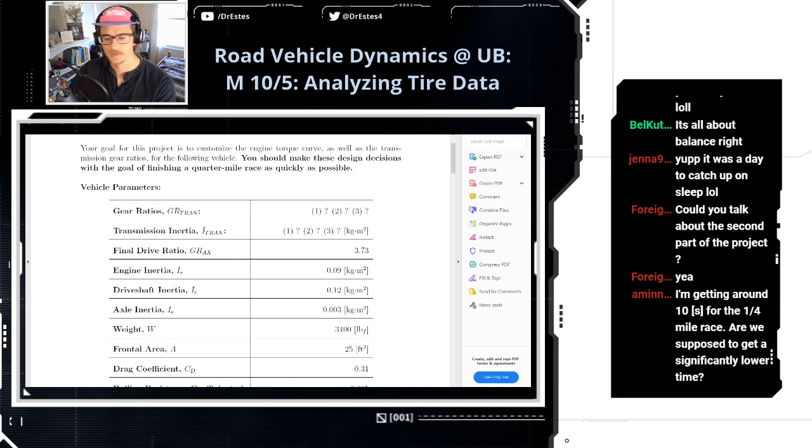Yeah, it's tough. Could you talk about the second part of the project? Are you talking about the group project? Gotcha, okay. Yeah, let's see. I'm getting around 10 seconds for the quarter-mile race. Are we supposed to get significantly lower time? I don't know. I've heard of some people getting 10 seconds. I don't know if you can get lower than that. I'm not sure what the best time is. We got 10.06, the best we can do. Hey! Oh, Hash Brown, you broke 10 seconds?

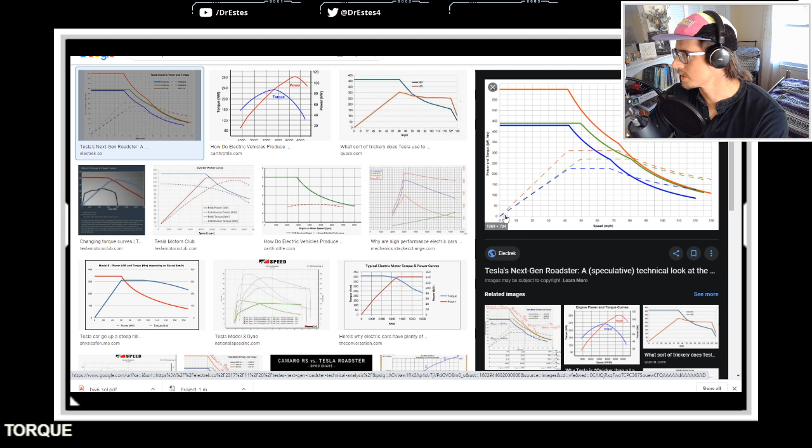It's tricky, guys, because I think there's lots of different solutions that can result in low times. Like, something we know about a Tesla, for example. A Tesla has its highest torque at 0 RPM. Wait, maybe I can pull it up real quick. So, let's see. If you look at a Tesla torque curve, it's something like this. This is the torque, and this is the engine speed on the x-axis. So the torque is highest, and then it kind of stays constant for a while, and then it decreases.

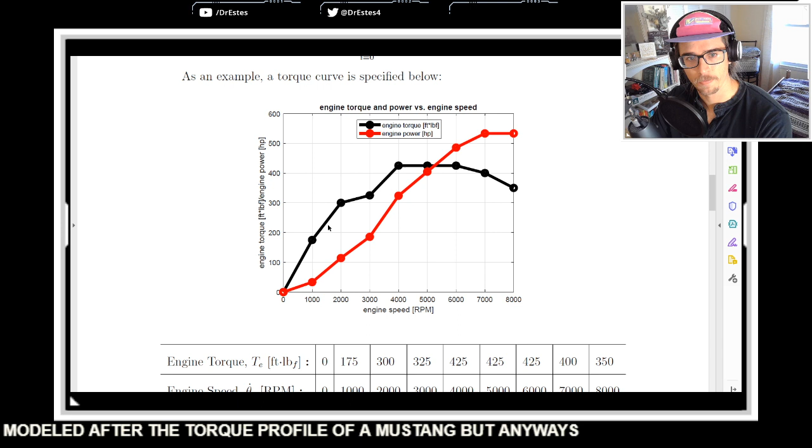And Teslas definitely pull in a quarter-mile race. But I also know that if you put a Corvette against a Tesla, a Corvette has no torque at 0 RPM. It looks very different. Actually this right here I kind of modeled after the torque profile of a Mustang. But anyways, a car like this will catch up with the Tesla at the end of the quarter-mile race, and they'll get a very similar quarter-mile time. So it's two different strategies: the Tesla very quick out of the gate, then it loses its advantage as the race gets longer, but a Mustang gains advantage the longer the race goes.

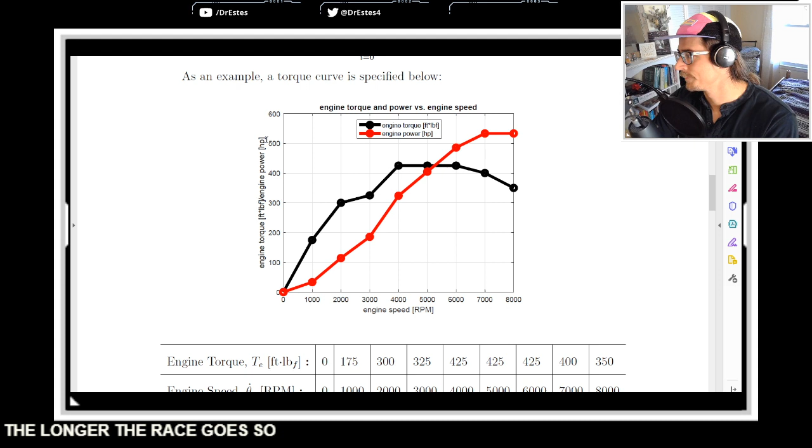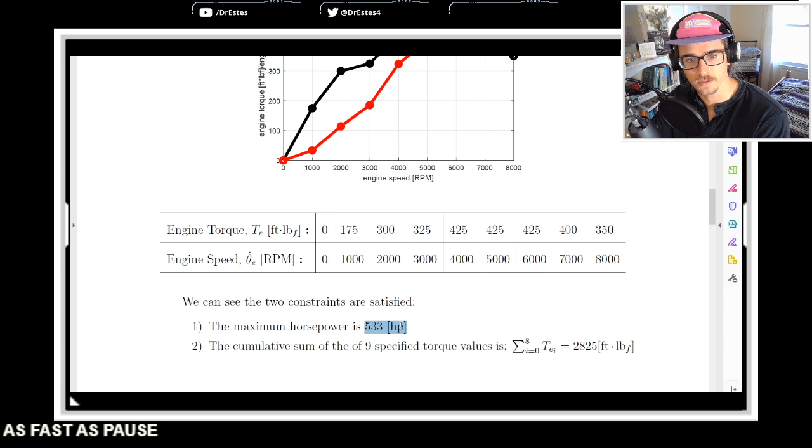All I'm saying is this graph, to get a really fast time, it could look very different. But I know certain principles that you definitely want to apply. Like if I give you these constraints... A Hellcat will actually beat a Tesla Model S P100D with the right tires. Yeah, you're absolutely right. A lot of it comes down to the tire grip. But you should definitely push right up to these constraints. This example I give you, it's not as fast as possible because I didn't create as much horsepower or torque as I could have.

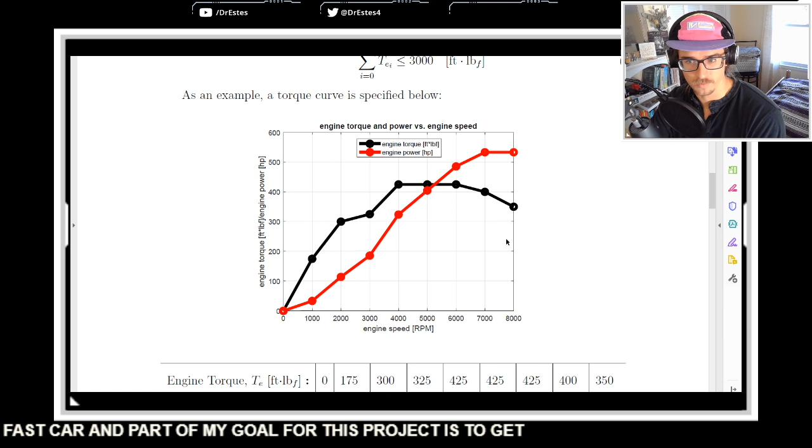And I know some people are taking an optimization approach to this. There's some optimizers within MATLAB to have a computer try a bunch of different combinations and find what works best. So it's up to you what kind of strategy you use. But there's not one perfect answer that we're going for here. There's going to be many different answers that can all result in a fast car. Part of my goal for this project is to get you thinking about that as a team, because it's pretty fun. The torque profiles for different fast cars all look very different. And once you throw on top of that you're picking your own gear ratios, that adds another layer.

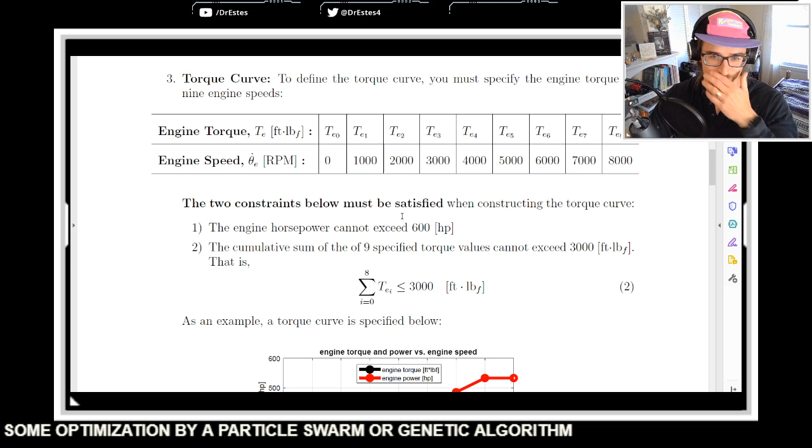So I want you to play around with it. Are you guys enjoying that project? If the time was enough, we may do some optimization via particle swarm or genetic algorithm. Yeah, I think that'll be a very interesting result. I think you guys should have fun with it, you know? Like, don't stress too much about the second part.

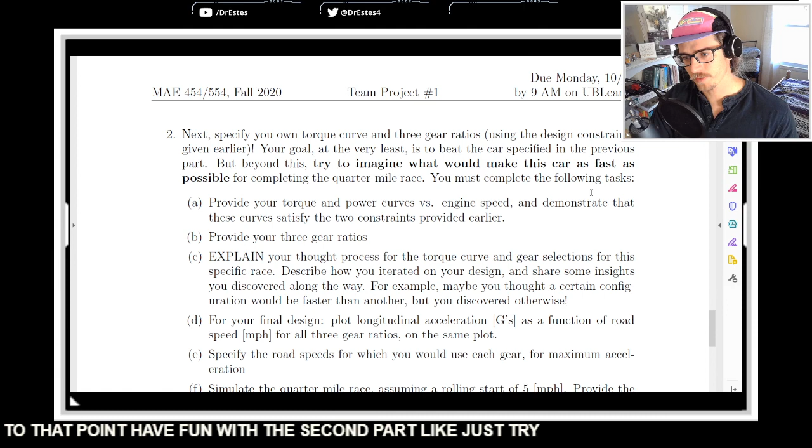Make sure that you guys as a team come up with a code that can replicate these results, and then you know that your code's working. And once you get to that point, have fun with the second part. Just try to make it as fast as possible. Know that there's not one answer, and a lot of your classmates are getting like a low 10-second time. So if you can beat 10 seconds, Hash Brown said their team got 9.8. If you can get into the 9 seconds, that's pretty cool.

Finbar asked, do you know how fast it can actually go? I don't know, because there's a bunch of different answers to this too. It's hard to have one optimal answer. Well, there has to be a fastest time, right? But I don't know if there's only one way to get to that fastest time, and I don't know what the fastest time is. The best that I've heard is what Hash Brown allegedly said, 9.8. What we should do, we'll put together a list and see who's getting the top time. It's not a competition, but I think it's kind of fun.

11-dimensional minimums are kind of hard to find. Yeah, there's a lot of optimal solutions. No, have fun, guys. Enjoy it. Work with your team and have fun.

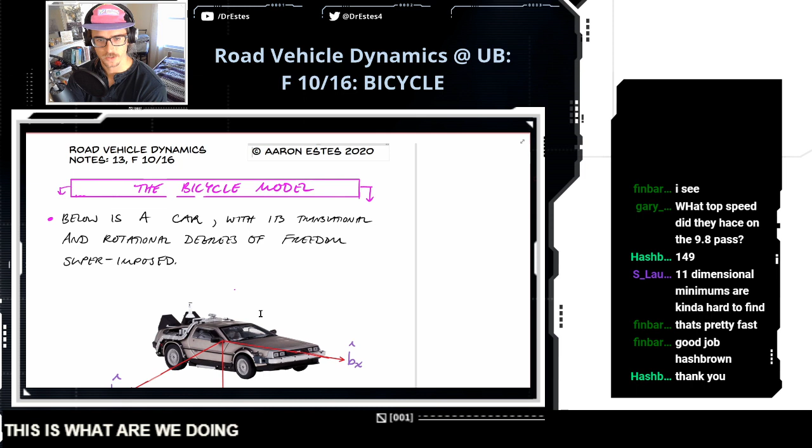Okay, we got to get going. But I got to change this title first. What are we doing? We're doing the bicycle model, but it's not for bicycles. I guess you could use it for a bicycle, but it's primarily used for cars. Let's talk about it. I gotta bring this music back a little bit.

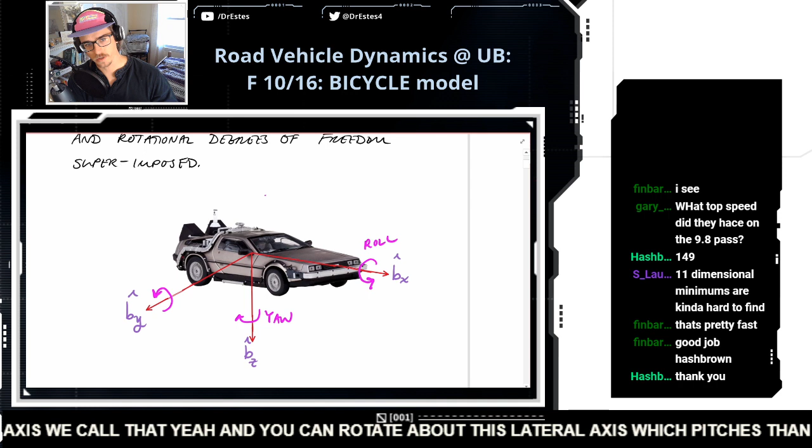Okay, so now we're getting into modeling the dynamics of a car in a more complicated fashion. So let's look at this car. You guys know what this car is from, right? So in general, you can move longitudinally, you can turn, you can corner, and as you do this, you can rotate about this longitudinal axis. We call that roll. You can rotate about this vertical axis. We call that yaw. And you can rotate about this lateral axis, which pitches the nose of the car up and down. So we call it pitch. All right.

And yes, that's right. Back to the Future. This car, if you drive it up to a specific speed, 88 miles per hour, that's correct, it transports you to who even knows when. A different time. Great Scott!

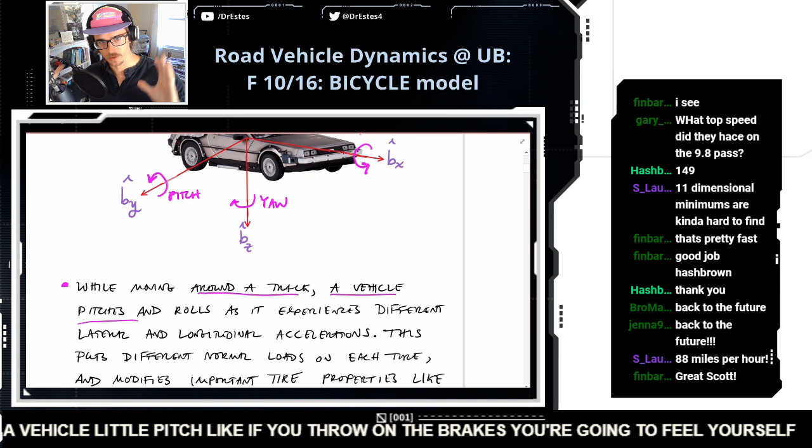And you've experienced this in your own car. You know that a vehicle will pitch. If you throw on the brakes, you're gonna feel yourself lurch forward, and the nose of the car actually kind of goes down, right? And the tail end goes up a little bit. So longitudinal acceleration causes pitching, and then your car rolls when you corner. So lateral and longitudinal accelerations cause these motions of the car.

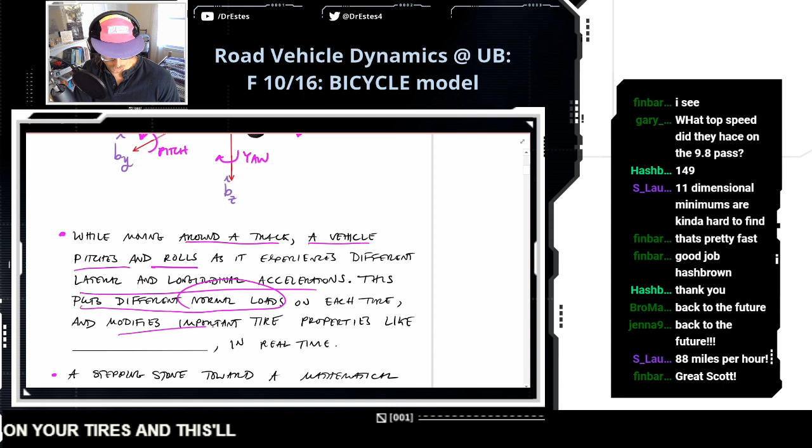And so we've been looking at tires, right? When you put different normal loads on a tire, it changes those tire properties. So when your vehicle rolls, it puts more weight on your outside tires. When you're taking a corner hard, that puts different normal loads on your tires, and this will modify important tire properties like cornering stiffness. Cornering stiffness is basically a measure of how much lateral force you get per lateral deformation of your tire. So you put more normal load on a tire, it's going to give you more cornering power.

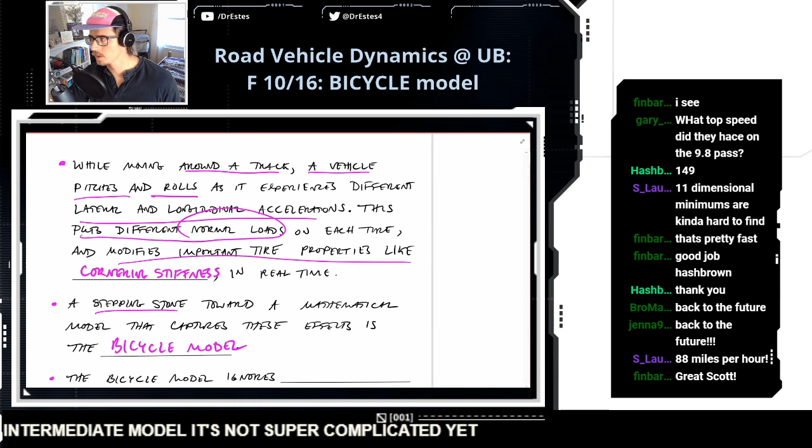Okay, so we're going to work towards modeling all of this complicated behavior on the track, but the bicycle model is a stepping stone towards getting all of these different effects. It's kind of like an intermediate model. It's not super complicated yet. And so how is this simpler? What is it ignoring? This bicycle model is going to ignore pitching and rolling. So it's kind of ignoring how the loads on the tires might change during a race.

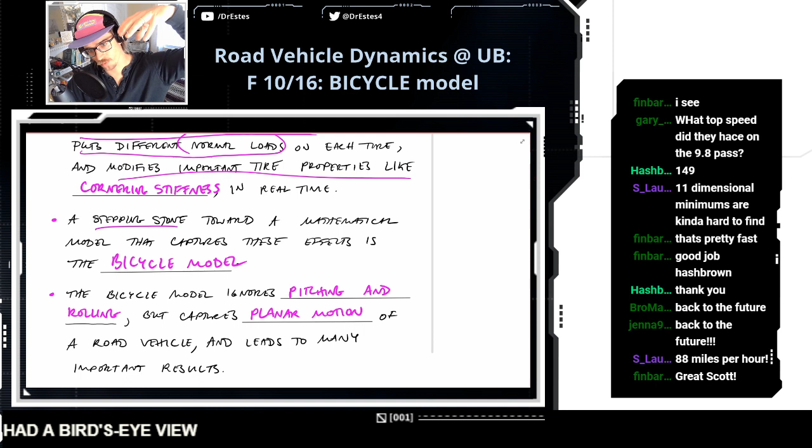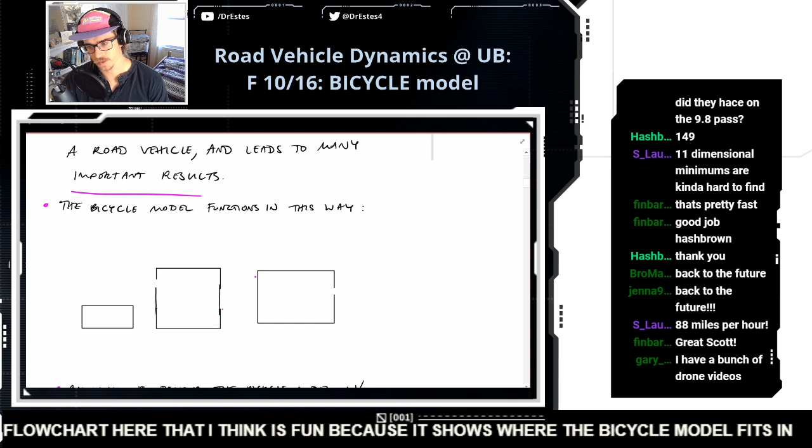Gary says I have a bunch of drone videos. Oh, from when you're at a track? Do you have drifting drone videos?

You need to share some of those videos. You can't keep those to yourself.

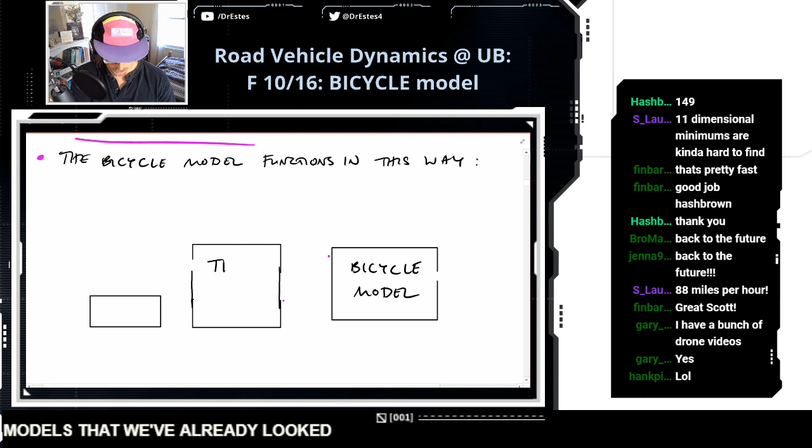So most recently, we've looked at some tire models. So what is a tire model? Well, like we have the graph of, maybe I can squeeze it in this box. We could have lateral force versus slip angle. That's a tire model. And it looks something like this, right? Like lateral force increases with slip angle up to a point, and then the force starts to drop off. So that's what I mean by a tire model. We have some relationship like that.

And then the other model that we did first in this class was the drivetrain model,

Put them on Discord. Yeah, throw those on Discord. I know there's like a limit to the file size you can upload, which might kill your vibe.

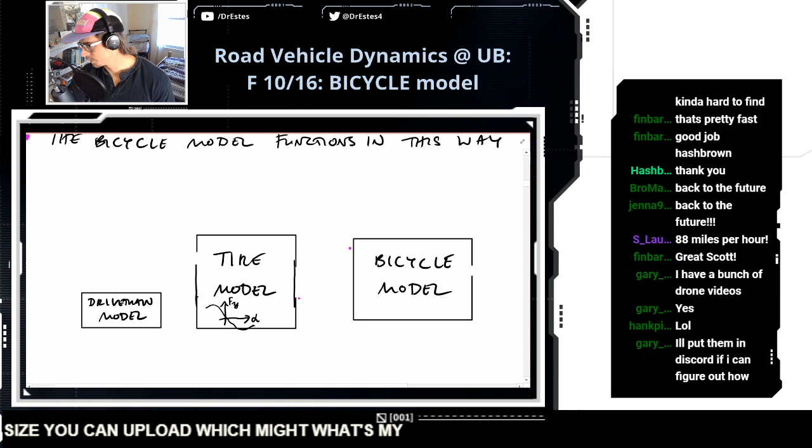So the drivetrain model relates how we go from the engine all the way to producing tractive force. Okay, so let's put some arrows on here. Let's connect everything. So the bicycle model, this is the output. It'll tell us the planar vehicle motion. So imagine looking at a car from

Hank says, I'm listening while doing the brake job on my car. Hey, that seems very appropriate.

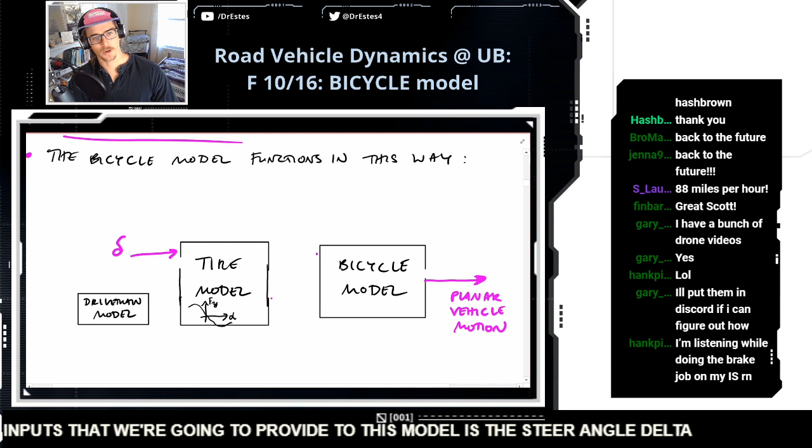So the output of the bicycle model is the vehicle motions. Let's talk about the inputs to the bicycle model. All right, so one of the inputs that we're going to provide to this model is the steer angle delta. So think about you're turning your steering wheel. So that affects your planar motion, right? What else do you control?

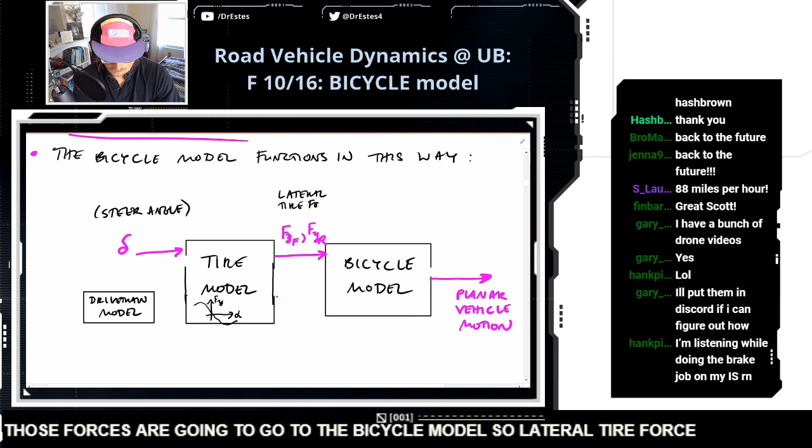So this steer angle goes to the tire model, which, when you steer the tire, it also creates a slip angle depending on the speed that you're going. And then based on that slip angle, we're going to produce some lateral tire forces at the front and the rear tires. So those forces are going to go to the bicycle model. So lateral tire force. Okay, so that's the function of a tire model. It tells you how much force you're getting out of a tire at a given time.

So another input, if you're sitting in the car, it's what do you do with the pedal? So the throttle. So the drivetrain model, you give a throttle input. When you press the gas pedal, it opens what we call the throttle body. It lets air into the engine, and that's what allows it to turn over and make torque. And we didn't talk too much about the relationship between the throttle and the engine torque. I might have mentioned it, but it's a pretty easy modification to our model to make the input be the throttle, okay?

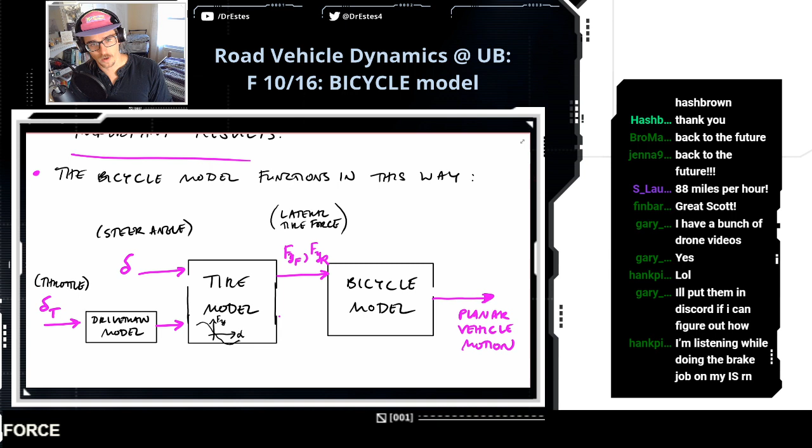And what comes out of this drivetrain model? Well, we know, like when you're doing the project right now, we get tractive force and so on, and that leads to acceleration. But I'm going to make the output instead be the wheel angular acceleration. And we know that the wheel angular acceleration, because tires deform, that's going to be a little different than the angular acceleration of the tire itself. So I know that's complex, but the point is that the tire is deforming.

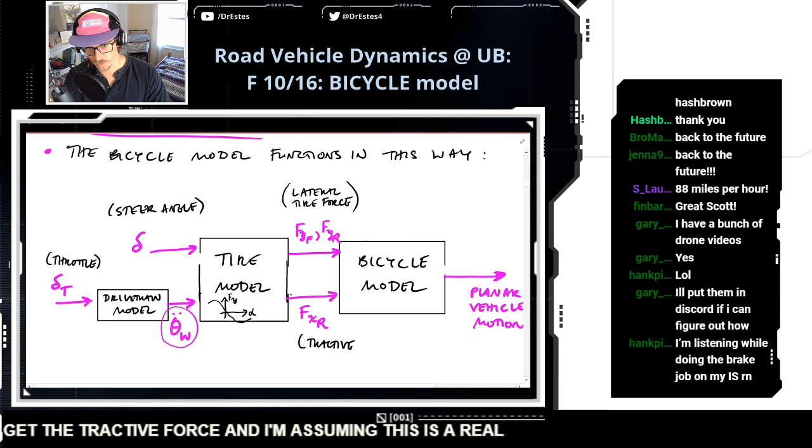So what we do is we take this motion of the wheel hub, we give it to the tire model, and we're going to get another tire force out of this. We're going to get the tractive force. And I'm assuming this is a rear wheel drive car, so I'm just putting the rear tire there. And remember, in our drivetrain model, the tractive force produces like an extra torque on the drivetrain components. So that kind of feeds back, and it makes this feedback loop where I'm applying a throttle. It eventually produces a force at the road, but that force at the road produces a reactive torque on my axle and so on.

Okay. So these boxes on the left, this is stuff that we've kind of looked at, and this is what your project involves right now. Well, really, your project doesn't involve a tire model, but that's okay. So this stuff gives us tire forces that we feed to the bicycle model, and the bicycle model gives us the resulting vehicle motion. And actually, it's important because this vehicle motion feeds back into the tire model, because depending on how fast you're going, how much you're cornering, that's going to affect your different accelerations. So some of the things that are fed back are your longitudinal acceleration and your lateral acceleration.

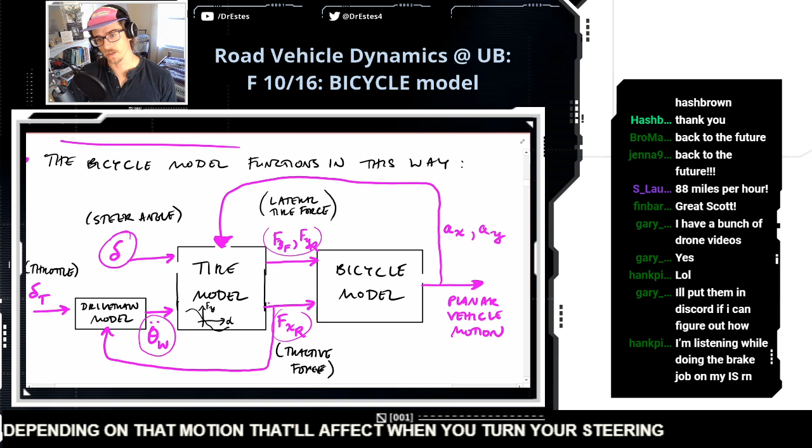And depending on that motion, that'll affect, when you turn your steering wheel, what kind of load that puts on the tire. So I think it's cool to step back from time to time, make a flow chart and say, like, where does all of my knowledge fit together? And so basically we're at the point where we're adding another piece to our toolbox to predict not just straight line motion of a car, but just wherever it wants to move in a plane.

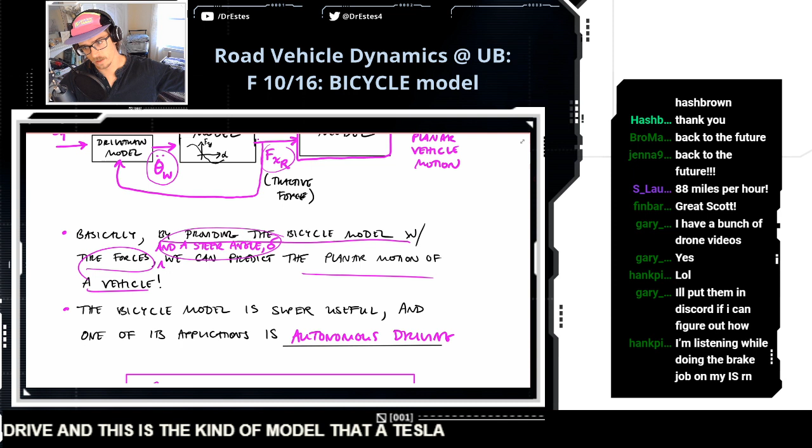Okay. So basically by providing the bicycle model with tire forces and a steer angle, we can predict the planar motion of a vehicle. So this bicycle model is super useful, but one application I want to point out is autonomous driving. You can take this model that we're going to derive, and this is the kind of model that a Tesla is using to make it stay in a lane, hopefully. So if you're interested in control systems, you're going to take this model and do some control with it. Okay, let's get into the bicycle model.

Yeah, hopefully the Tesla stays in lane, right? Hopefully it puts on the brakes at the right time. It seems to be doing pretty well, right? Would you fall asleep behind the wheel of a Tesla? Would you trust it? I don't know if I would, but I think it does a good job.

Okay, this is an interesting thing about the bicycle model.

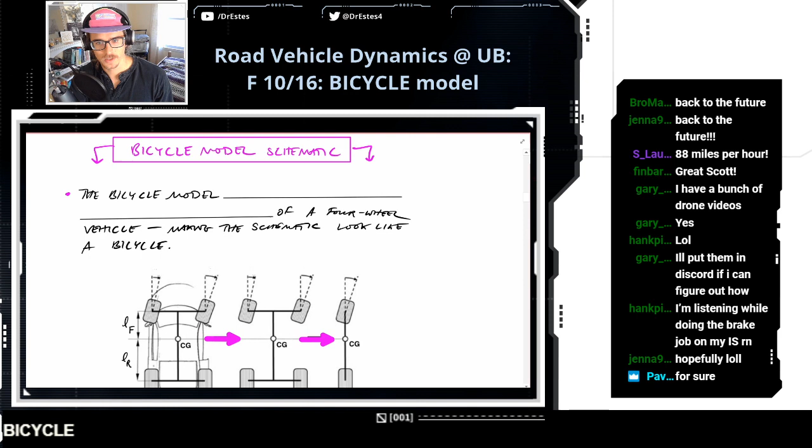No way. Let Jesus take the wheel. Let Elon Musk take the wheel.

Okay, so this is how a car turns into a bicycle. The bicycle model lumps together the front tires. It takes both front tires, turns them into one tire, and it lumps together the rear tires as well. So let's break this down a little bit.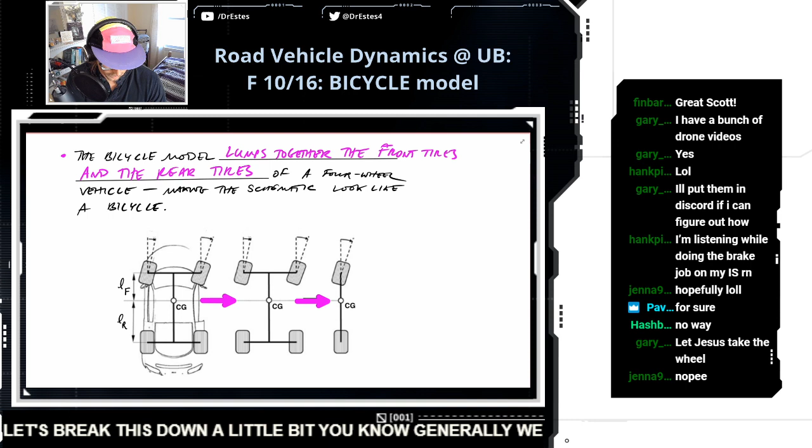You know, generally when you're turning, you steer the front tires and you have a steer angle at your right front tire, so delta right front, and you generally have a different steer angle at your other tire, delta left front. So this depends on the steering geometry, but in case you were ever curious, when you turn the steering wheel, your different tires turn a different amount.

Abhinav says, can this concept help in ABS control systems? Yes. Oh yeah, this model helps with traction control. Well, it's best to have a 4-wheel model for traction control, but when you can do the bicycle model, you can quickly extend it to a 4-wheel model.

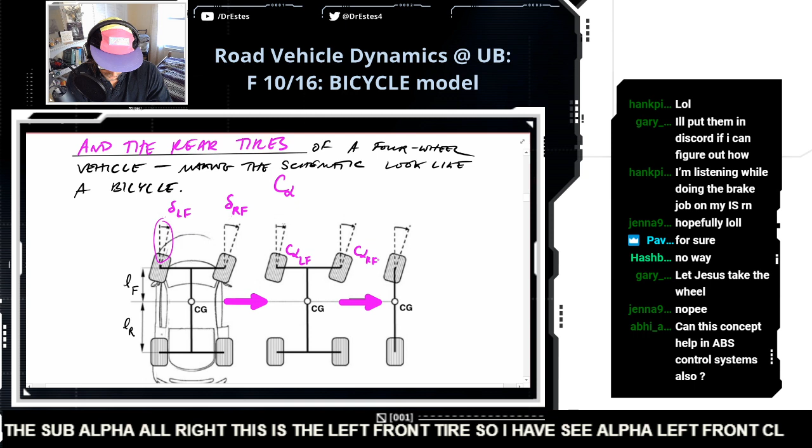Okay, and we know that each of these tires is going to have its own cornering stiffness. So cornering stiffness is C sub alpha. All right, this is the left front tire. So I have C alpha left front, C alpha right front, and these cornering stiffnesses are always changing as you're driving. Right rear, depending on how the weight is shifting on these tires. But remember, the bicycle model is ignoring some of this weight shift because we squeeze both of these tires together to make what I call a super tire.

Why do I call it a super tire? Because the cornering stiffness of this one front tire, what we have to do is combine the cornering stiffnesses of the two original tires, because we combined them. So you could think of it like a super tire.

Can't put videos on Discord, 8 megabyte max. Yeah, the same thing happened to me when I tried to put that Lancaster Speedway stuff up. You gotta throw it on YouTube, man.

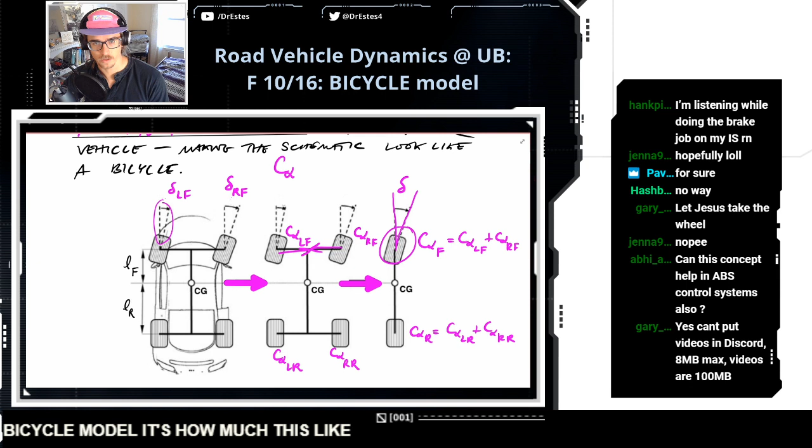Okay, now, also instead of having 2 steer angles, we're just gonna have one in this model. So this is the steering input to the bicycle model. It's how much this super tire is steered. All right, so that's how you squeeze tires together. So the resulting front and rear tires you could think of as super tires, like I said.

You could put the video on Google Drive. Oh, that's a good point. And give us a link.

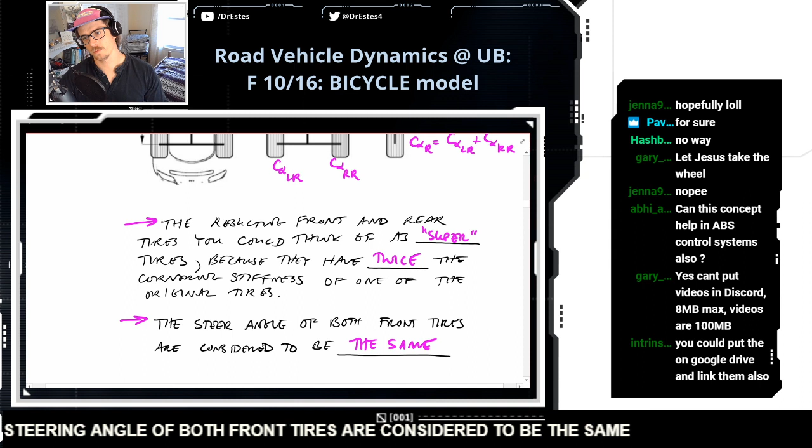So these are super tires because they have effectively twice the cornering stiffness of one of the original tires. And the steer angle of both front tires are considered to be the same, or we end up just having one steer angle for this model. Okay, so that's the gist of a bicycle model. Now, because the tires are combined, this model, I've mentioned this before, it doesn't account for load transfer between tires.

Because there's just one tire. There's no tire to shift your load to while you're cornering. And like I said before, this model's planar. So there's no rolling, no pitching, no up and down motions of suspension dynamics. Okay, let's get into some details.

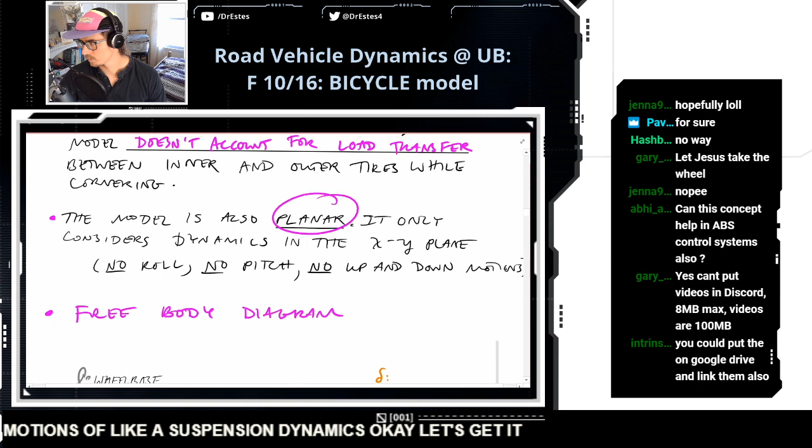We're gonna make a free body diagram. So first I'll zoom out of this so you can see what this is. You can see this is the front super tire, and I steered it a little bit to the right. We have the rear super tire. And usually you don't steer the rear tires, even though there are some cars where that happens. But we're just assuming that this tire is fixed. It's aligned with the longitudinal axis of the car.

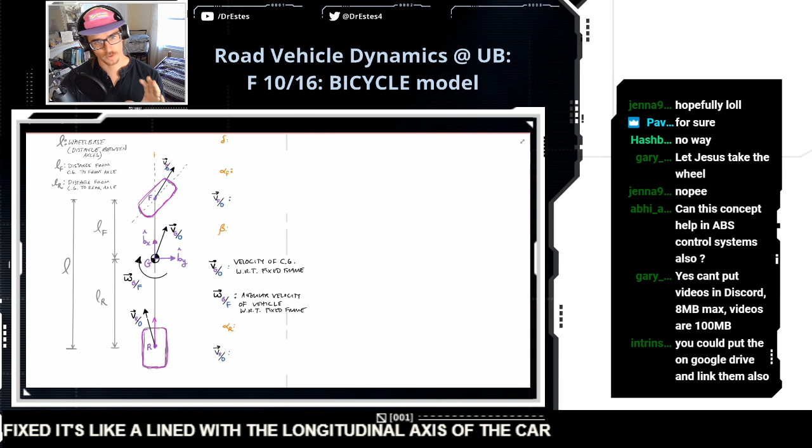So what we're going to do is go through this. We're going to break it down piece by piece, define some variables and quantities that we'll need. So let's just talk about the weight distribution first. You can see the center of gravity right here. And I call this G.

Hey, you got the brake off. Congratulations, Hank.

So the center of gravity is located somewhere between the front and the rear axle, obviously, or you're going to have something very wrong with your car. And the distance between the front and rear axles, we call that the wheelbase. And if you want to get the distance from the CG to one of your axles, we have these variables like L sub F, L sub R. It's just the distance of the CG from the front or the rear axle. Okay? So that's the weight distribution thing.

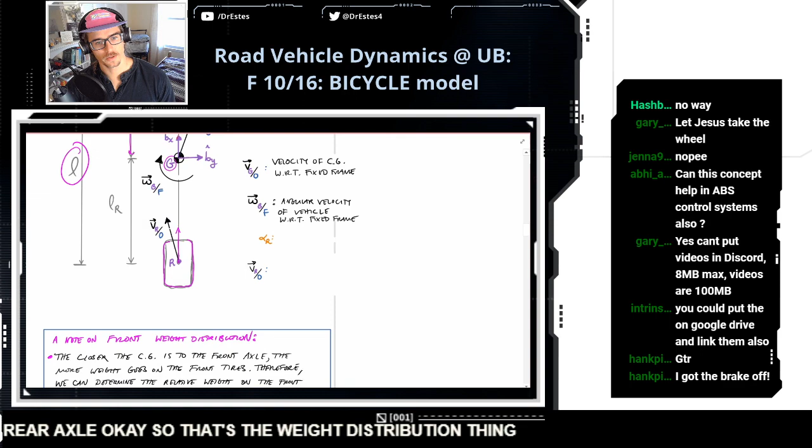And actually, I put a little note down here, which I won't spend too much time on because we talked about it before. But the front weight percentage, you can calculate. The front weight percentage is how much weight is on the front tires relative to the total weight of the vehicle. You can calculate that quickly using this formula. And depending on how much weight is on these tires, you can estimate the cornering stiffness properties, whatever.

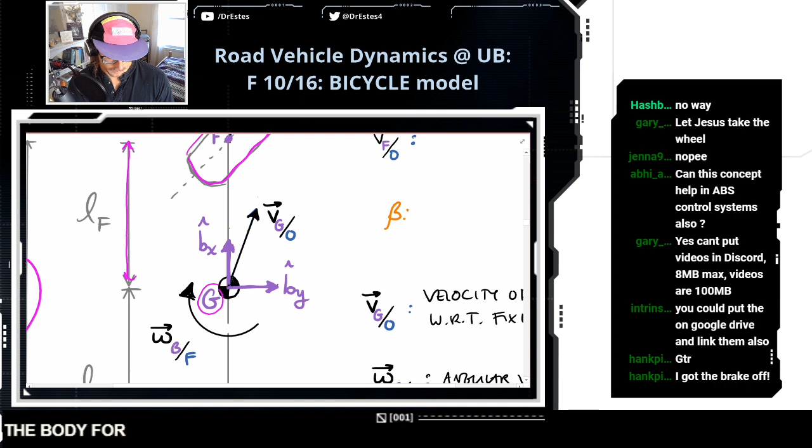Okay, let's look at the CG really quick. We have our vehicle axis system. So you have B sub X, that's the longitudinal axis of the car. B sub Y, the lateral axis of the car. And this is stuck to the car and it moves with the car. So this coordinate system is a moving reference frame, and it's called the body frame. And this right here is the velocity of the center of gravity relative to the origin of our fixed frame, O. So I wrote that right here. It's just the velocity of the center of gravity with respect to a fixed frame.

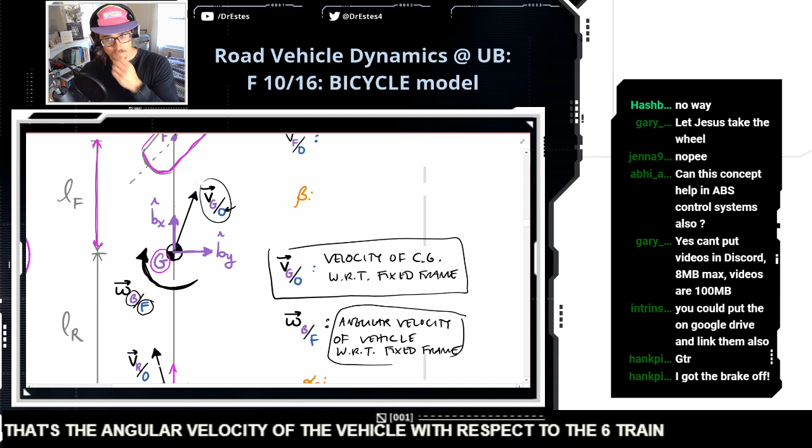Let's also talk about this omega term, because if you're taking a corner, let's say a right corner, then your vehicle is rotating, or the body frame, which is fixed to the car, is rotating relative to the fixed frame with some rate. Like if you're going in a circle, your car is rotating in space. So that's the angular velocity of the vehicle with respect to the fixed frame. So we're imagining this thing translating, moving in some XY direction, and it's also rotating in space.

Let's focus on the front tire now, because there's a couple angles I want to point out. We mentioned that there's a tire coordinate system as well. And one axis of the tire is right along the wheel plane. And I actually can't remember what I called this axis. Maybe it was X front tire. I'm making this up right now. Okay, but you get the point. This axis defines where your tire is pointing. Now, here I have the velocity of the front tire.

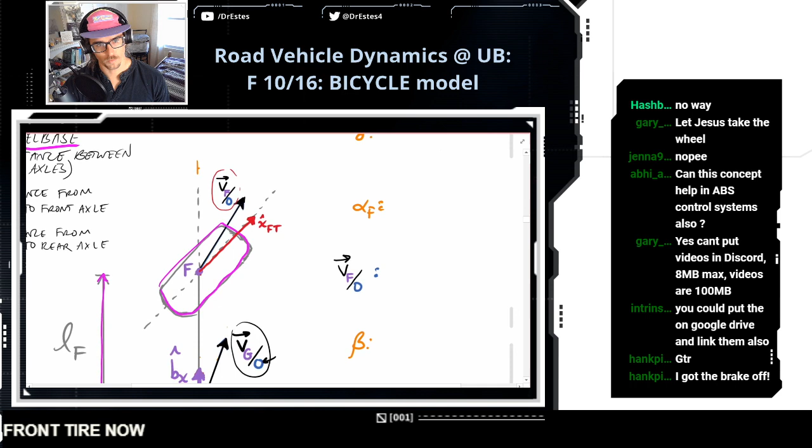Now, what am I doing here? Because I already defined the velocity of the CG of the car. And isn't the front tire stuck to the car? Shouldn't the front tire be going at the same speed as the CG of the car? I mean, that's an assumption we made for straight line racing, that the whole car is moving as a unit in one direction, so everything's moving the same translational speed, right? So why does the front tire have a different speed than the CG in this case? Amin is saying they should, right? They should have the same velocity.

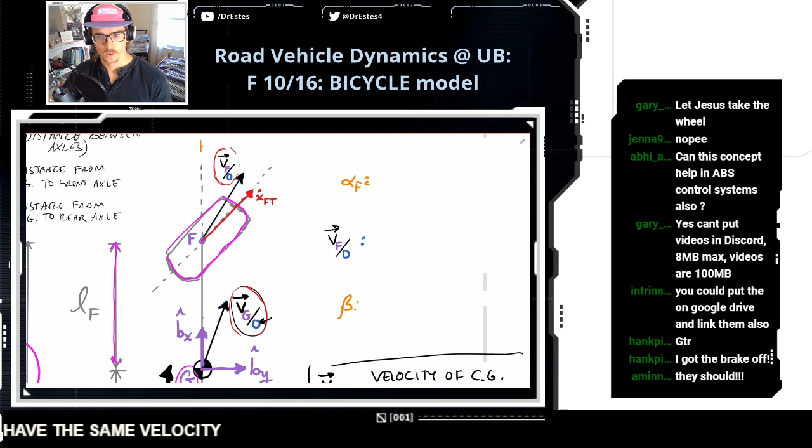Okay, let me tell you why. We're gonna use this pen. So let's say this pen, everything is connected to the rigid body, right? So if I just move it forward towards the camera, everything is moving at the same velocity, right? But what if I rotate it as I move it towards the camera? That means that the tip of the pen is actually moving, because it's doing a circular motion and it's moving forward. It's moving faster than the center of this pen.

Does that make sense? Like if you swing a club at somebody, the tip of the club is moving fast. Okay, that's a bad analogy. But the reason that the front tire has a different velocity is because this thing is rotating. Like as you corner, rotation and translation, yes. Because we're not purely translating, the car's also rotating, that's why. So the tip has both translational and rotational speed. That's correct. That is exactly correct. So that's why I have to have a velocity.

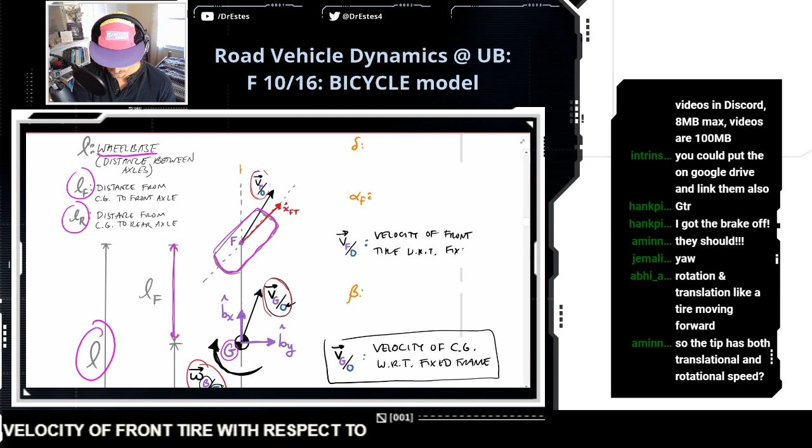Okay, so this is velocity of front tire with respect to the fixed frame. And while we're at it, let's point out that the rear tire has its own velocity as well, because both of these ends are rotating about that CG. So velocity of rear tire with respect to fixed frame. So these velocities are different because of rotation. Let's go back to the front tire.

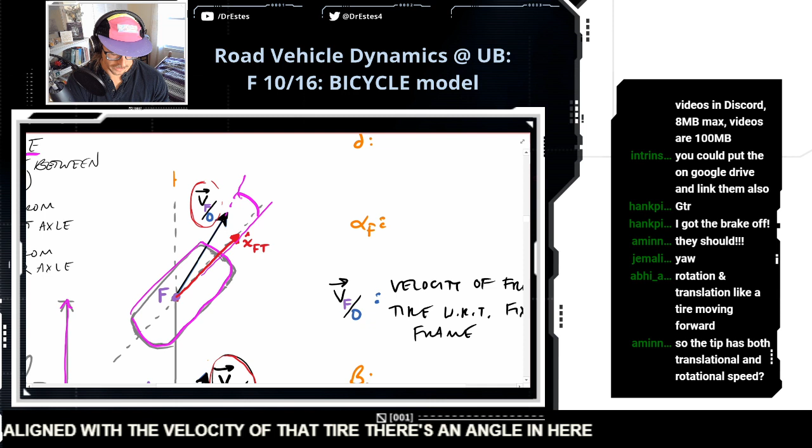Okay, so like we've studied with tires, the longitudinal axis of the tire is not usually aligned with the velocity of that tire. There's an angle in here measured from the longitudinal axis to the velocity vector, and what is that angle called? And there's a hint, it's going to be right here. Yes. Wait, the side slip angle? Slip something? Very close, very close. Okay, this is a slip angle. Whenever you have this angle at a tire, slip angle at the front tire.

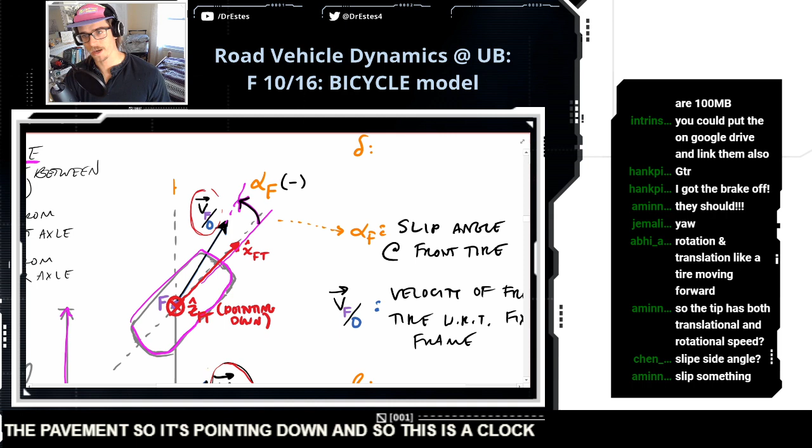And actually, not to confuse you guys, but the angle, the way I've shown it here, this is a negative slip angle, because we measure it from this axis to this axis, and usually that would be following the right hand rule, right? And this would be a positive angle, but you have to remember that the z axis of a tire goes into the pavement. So it's pointing down. And so this is a clockwise rotation about the down axis. So it's a negative slip angle. Okay.

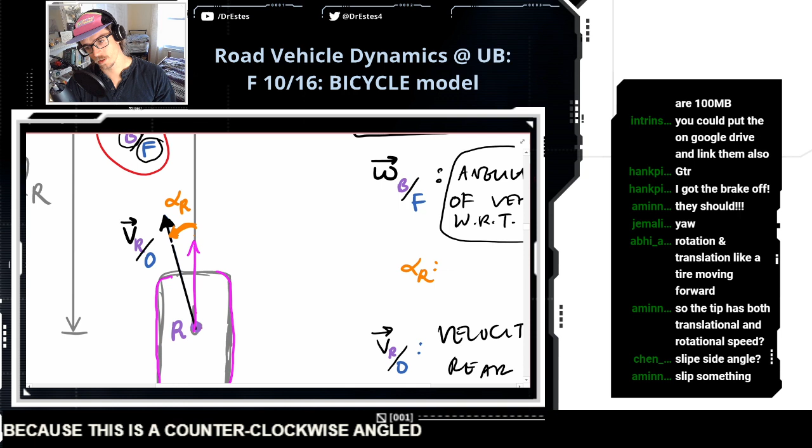And let's point out the slip angle at the rear tire as well while we're doing this. Because even though the rear tire doesn't steer, it can still have a difference between its longitudinal axis and its velocity vector. And the tire will deform. So it's not just your front tires that deform. You need to recognize that. The rear tires also have a slip angle. And because this is a counterclockwise angle from the top view, this is going to be a negative slip angle. Okay, so this is slip angle for the rear tire.

And we know that slip multiplied with cornering stiffness, the product is lateral force. So in this picture, the rear tire is producing lateral force, the front tire is producing lateral force, and we are cornering to the right. Actually, let's draw the lateral force then while we're doing it. We know that the net lateral force... What's the difference between slip angle and steer angle? Oh, good. Actually, I should point that out, because I didn't even draw that here.

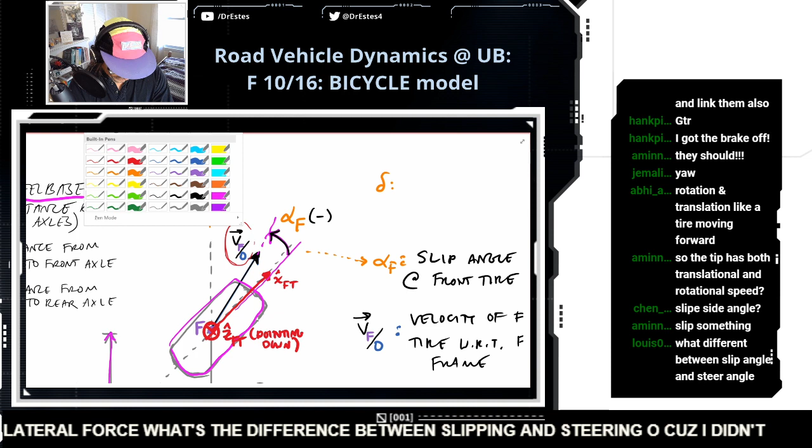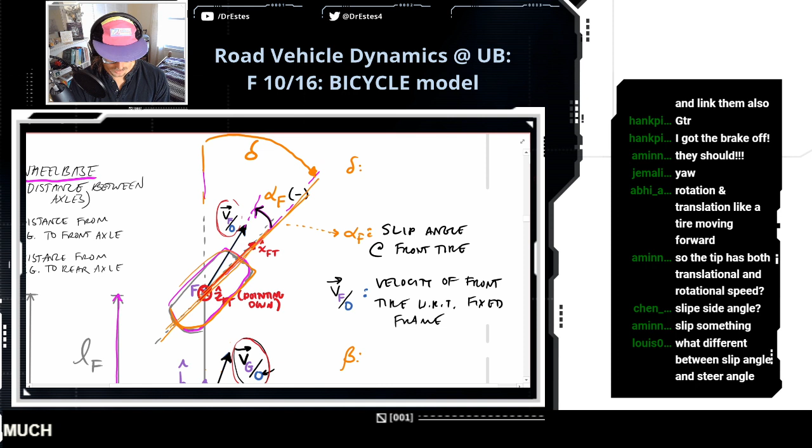Okay, the steer angle is the angle that this tire deviates from the longitudinal axis of the car. So if you look at this, how much did this front tire actually turn? Well, that's talking about how much the longitudinal tire axis has deviated from the longitudinal axis. How much did it deviate from the car? So this is the steer angle. And this is a positive steer angle because it's going clockwise from this view, but that's counterclockwise about the downward axis, just to be confusing. So that's the steer angle.

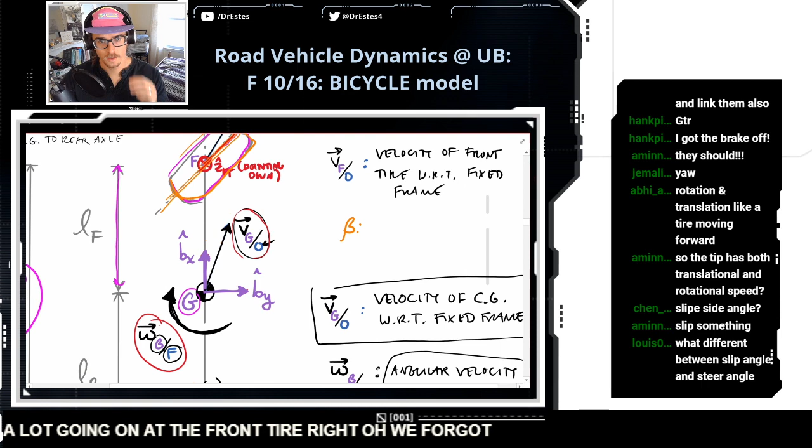Okay, so there's a lot going on at the front tire, right? Ooh, we forgot to point out an important angle that Gary loves. And that's the difference between the longitudinal axis of your car and the velocity of the CG. Do you remember what this angle is called? I think I only mentioned it briefly, but it's this guy right here. And it's negative right here. Or wait. No, this is positive. It does have slip in the title. Yes!

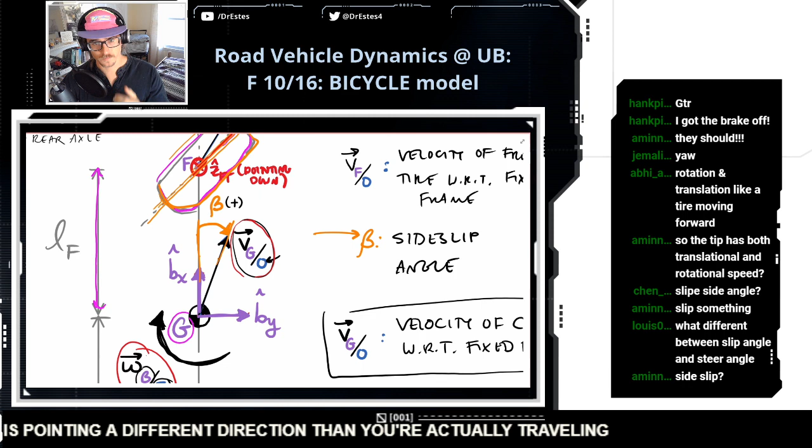The side slip angle. So when you're drifting, it basically means your car is pointing a different direction than you're actually traveling. So if you build up side slip, you're probably drifting. But there's always a little bit of side slip in a car. Okay. We are moving right along here. Okay, what else do I need to... Okay, the only thing we need now, we need to put some forces on here. This is a free body diagram after all. Okay, so we know that, let's see.

We're turning to the right here. We know from SAE convention that a negative slip angle produces positive lateral force, and positive lateral force is to the right. So just to draw a picture to remind us, if you look at this tire from the top, you're gonna see a bubble where the contact patch is kind of smeared in the direction that we're cornering. And that's the same direction that our lateral force is going to act.

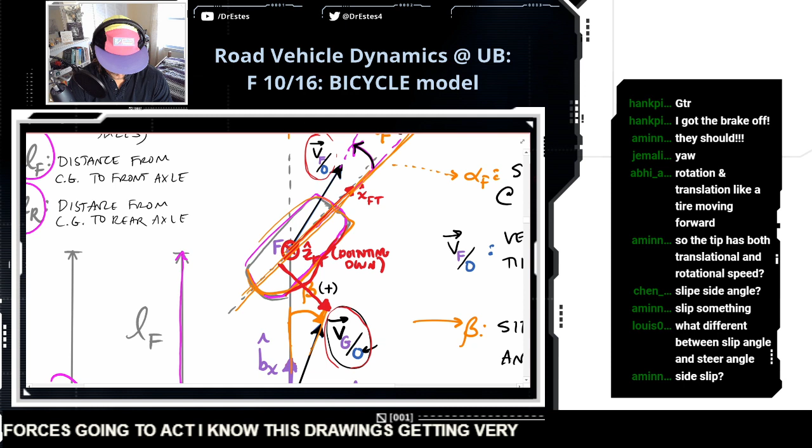And I know this drawing's getting very busy. But this is our lateral force in this case. And we know that it acts behind the center of the tire. So we'll just draw it right there. Okay, so that's the lateral force.

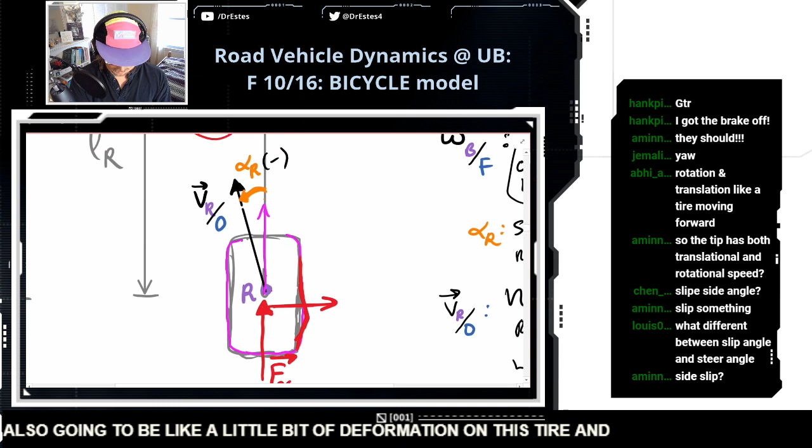Now for the rear tire, let's assume that this is a rear wheel drive car. So number one, we're gonna have some tractive force at the rear if we're delivering torque to that wheel. But if we're looking at this from the top, there's also going to be a little bit of deformation on this tire. And because of that slip angle, that indicates that the tire's deforming a little bit. We're going to have some lateral force at the rear tire.

And then if we zoom out a little bit here, you get to see the whole picture. This is what the bicycle model looks like when it's navigating a right turn. And there's so many symbols flying around right now, it's hard to even tell what's going on, right?

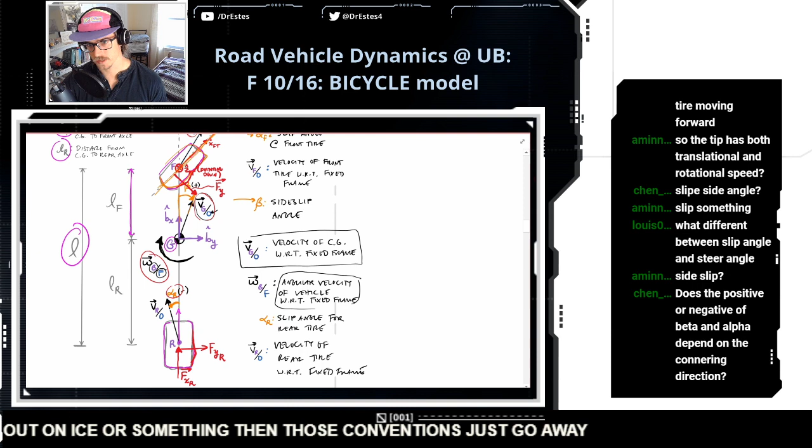Does the positive or negative of beta and alpha depend on the cornering direction? Yes, Chen. I will say as long as the tires are not sliding, yes. Because once the tires totally lose traction, say you're spinning out on ice or something, then those conventions just go away. But as long as the tires are sticking to the road, if you have a negative slip angle, that means you're going to be turning to the right for the rear and the front tires.

The side slip angle, this one, I think it kind of depends. Yeah, that one depends. We'll talk more about it, but I think I've mentioned this before. When you take a corner at a low speed, the nose of your car is going to point outside of the corner.

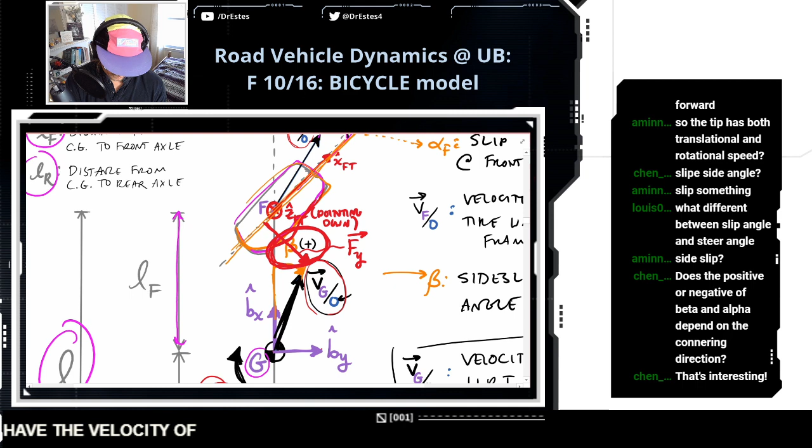So in this picture that I have here, I have the velocity vector going to the right, and the nose of the vehicle is pointed outside of this. So if we're turning on a circle, this is the path of the vehicle, sort of, but the nose of the car is pointed outside. That happens for all cars at low speeds. As you take a corner faster and faster, the nose of your car tends to point in. And this is more dramatic. But in this case, the side slip would be negative.

There's a special speed for every car where the nose is lined up with the velocity vector, and that's called the tangent speed. We'll derive that later.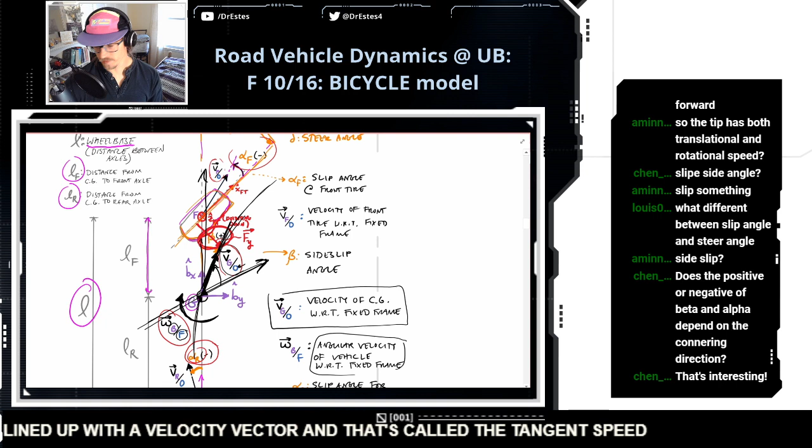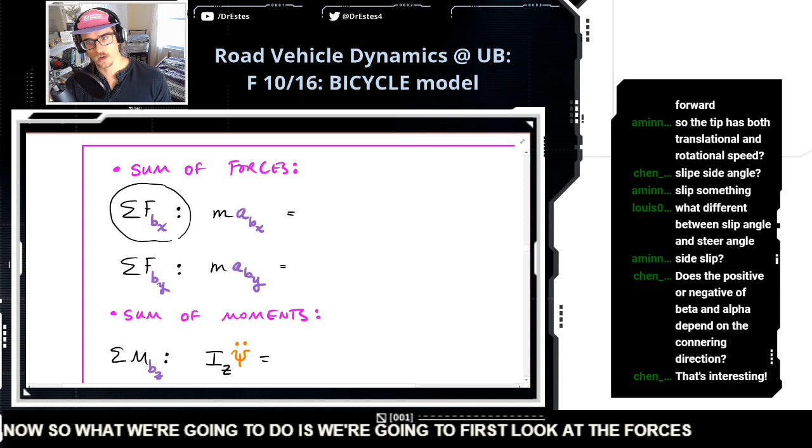Okay, let's see what we got here. We have like 1 minute, but we made a free body diagram, right? So let's do the sum of forces. Let's at least finish that. That'll be a good result to finish with. So what we're going to do is first look at the forces that are acting along the longitudinal axis of the body, pointing down the nose.

And so our forces, well really there's only 3 forces that I drew. 2 of them are at the rear tire. And this one is pointed right along the nose of the vehicle. It's the tractive force. So let's take it and throw it on right here. The mass times the acceleration in that longitudinal direction, number one, is going to equal that force.

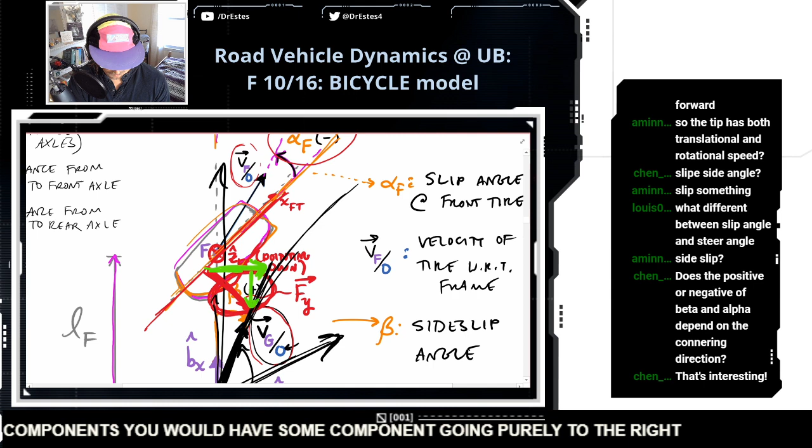But we have to be careful here. And this just looks like a mess at this point, okay? But if you look at the lateral force, which is pointed perpendicular to the wheel plane of the front tire, I'm going to try to do this in green. If you broke this into components, you would have some component going purely to the right, and then some component that's actually pointing towards your rear axle.

So when you corner the front tire, a component of its force is actually making you go slower. And that's called induced drag. Maybe I'll just circle that. Induced drag. So whenever you turn a tire, a component of its force fights you. It creates induced drag. So we have to get this component of it.

So we have our tractive force pushing us forward, but we have our induced drag fighting us, and I have to multiply this by the sine of the steer angle to get the component that's actually pointing backwards.

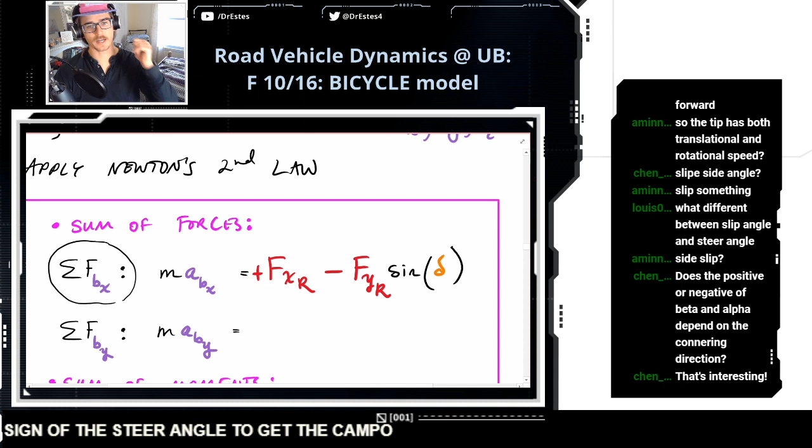And that's it. These are the forces. Now if we do the lateral force, so the force going to the right of the body, we don't even have to go back to the picture for this. We know that there's some lateral force from the rear tire. And then the lateral force from the front tire, it wasn't pointed directly to the right. It's kind of pointed diagonally, but we have to get the component of it that was going to the right, and that's the cosine of the steer angle.

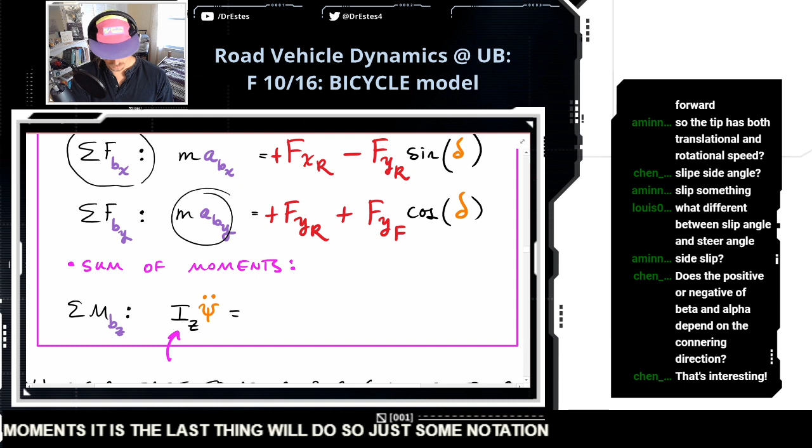And oh wait, let's do the sum of moments. And this is the last thing we'll do. So just some notation. You have the moment of inertia about the z-axis. And this is the angular acceleration about the z-axis. And we'll talk more about this symbol, psi. The angle psi is your heading angle. But we'll get into that.

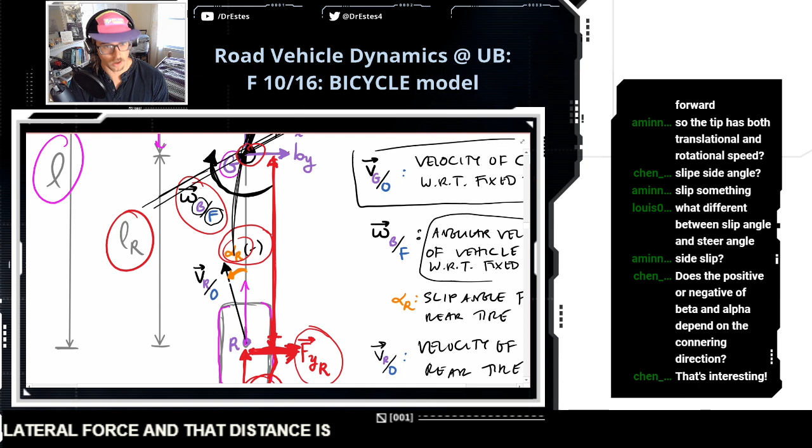Okay, so you're going to have your lateral force from the rear tire, but the moment that it produces about the center of gravity is based on the lever arm. So the distance that the lateral force acts from the CG. So let's go back to the picture. We have the lateral force right here, and we're looking for the moment it produces about the CG. So we need the distance from the CG to the lateral force, and that distance is going to be LR, because that's the distance from the CG to the axle.

And then we're going to ignore this, but there's a tiny distance here, because we know the lateral force actually acts a little bit behind the center of the tire. Do you remember what that distance is called? We used a symbol little e, and it has a very fancy name, this little distance. But if you take the moment arm LR plus e, it's basically LR. Let's not kid ourselves. So we tend to ignore this.

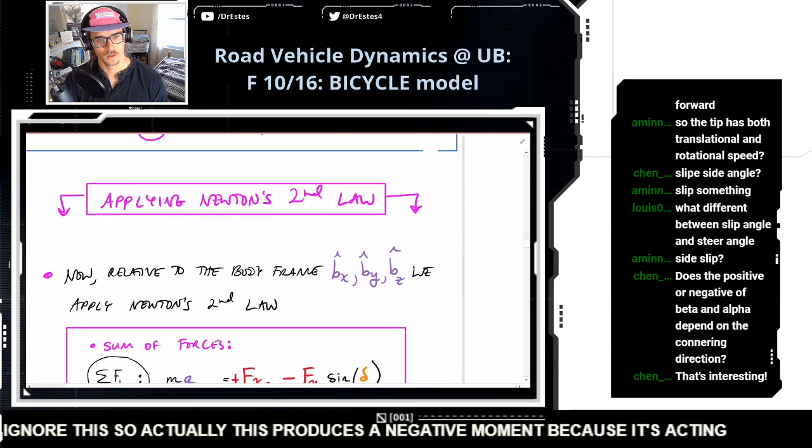So, and actually this produces a negative moment, because if you push to the right about this lever, it tends to make the car want to rotate counterclockwise. Yes, the pneumatic trail, that's the special name of the little e. Such a fancy name for that. Okay, so that produces a negative moment. This tractive force doesn't produce a moment because it acts right through the CG.

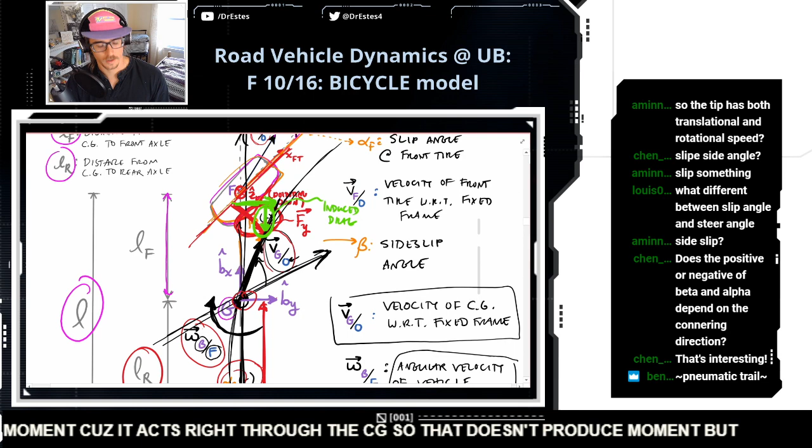But, oh man, this looks like a piece of abstract art at this point. But this component of the lateral force produces a positive moment because it acts over this lever arm, which is LF, and it wants to rotate the car in the opposite direction. Yeah, look, they're like fighting each other. Okay, so this, from the front tire, produces a positive moment, the lever arm is LF, and the force is the component that's going to the right, cosine delta.

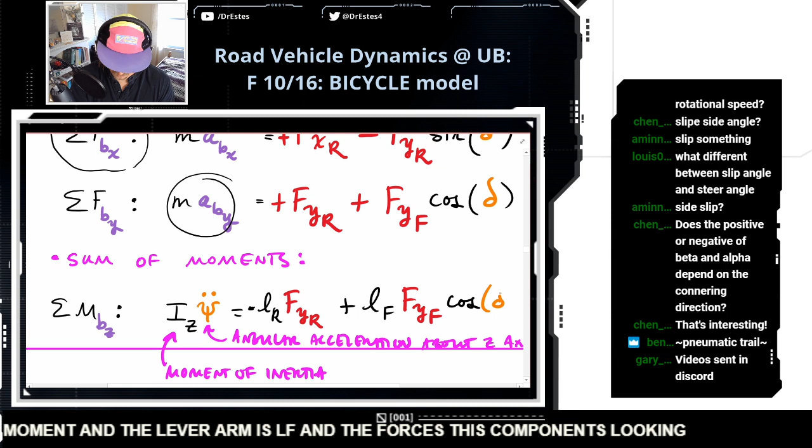Video sent to Discord? Oh, sweet.

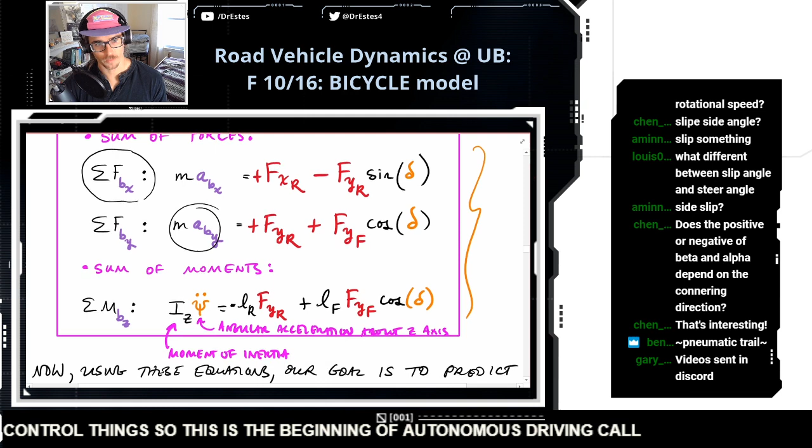Okay, these are the sum of forces and moments on the free body diagram. And this is the beginnings of our bicycle model, the cornerstone of it. These three equations, right? Because these Newton's laws produce a differential equation. And differential equations are what we use to control things. So this is the beginning of autonomous driving. Oh man, but we have a lot to do with these equations. It's gonna be pretty cool.

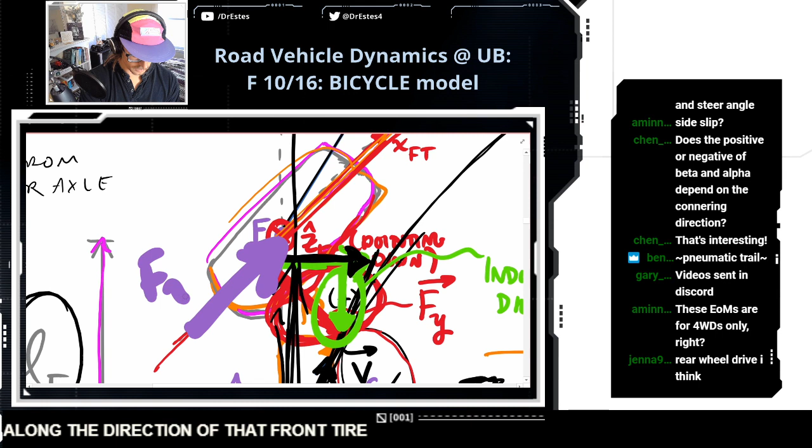Wait, let's see if we can go to Discord. These equations of motion are for four-wheel drives only, right? No. This one would be rear-wheel drive, because I didn't put any tractive force at the front tire. I only put lateral force. But if we made a force that goes along the direction of that front tire, FX front, we could make this four-wheel drive.

Wait, let's see. Oh, I have to request access to your videos, Gary. All right, guys. That's the content for today. I might pull up some of these drone videos if I get some access here.

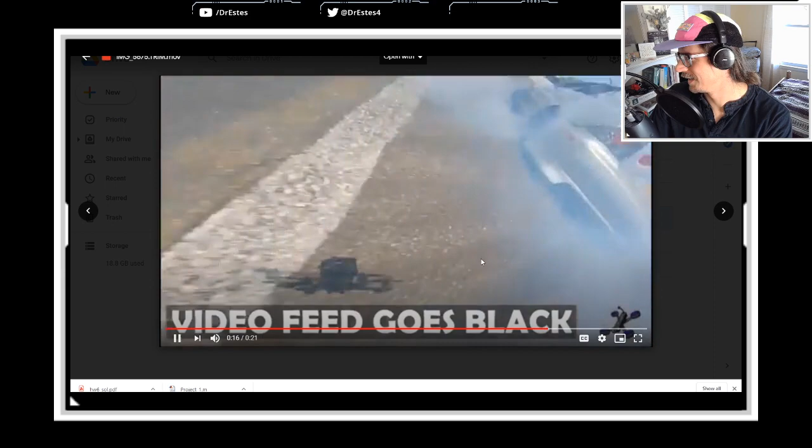All right, let's do a drone. Like this one. Oh. Oh, this is amazing. Wait, did you crash a drone? You just crashed a drone?

Oh, you're in the silver car? This is you? You crashed a drone? What happened? What's going on? Oh my goodness. Rest in peace. I know. I know. Oh, this is so fun. Oh, I thought they were going to break another drone right there. Jeez, between the car and the concrete barrier.

Oh, what do we have here? Jeez. Now this is interesting because right now the vehicle's turning right, but look, the front tires are steered left. We're making a right-hand turn, locked out to the left. Now we're making a left turn, locked out to the right. Is that tire even on the ground?